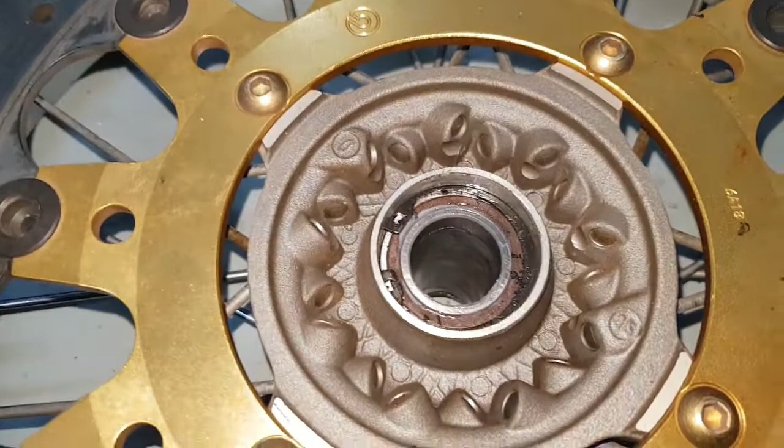Getting to your forks. Don't worry about it. Unfortunately, tomorrow the company closes, and I want to get the front bearings as well. So, yeah, that's the seal. This thing is rock hard. I mean, this thing is not plastic or rubber anymore. It just is. All right, that's the discoloration. So, high time to get rid of this.

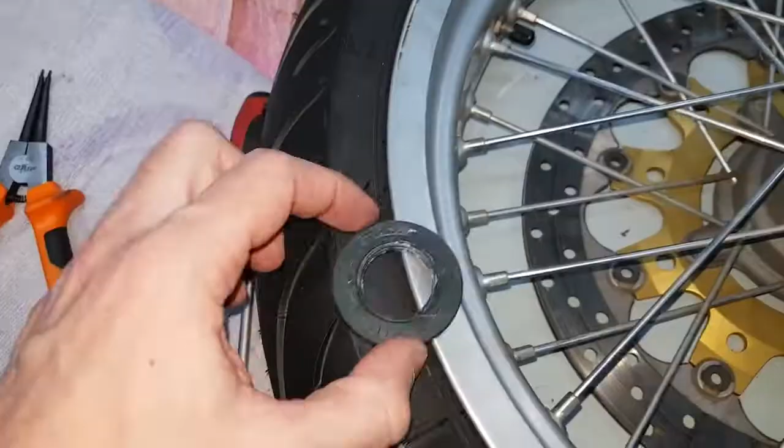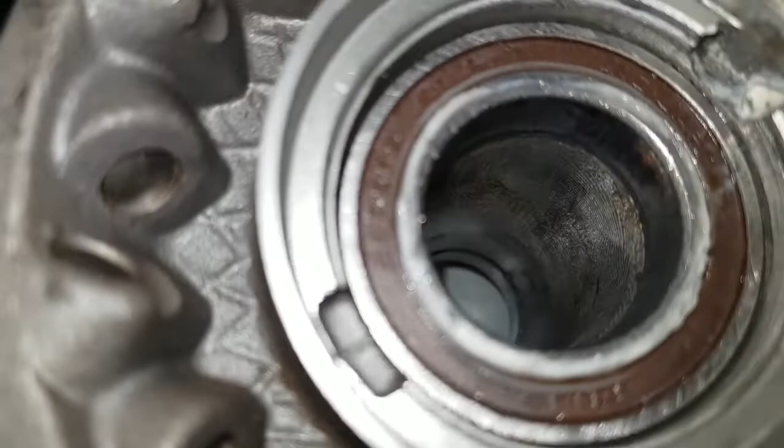That's interesting. Circlips. That is the seal of the other side. That's rust, and this one just popped out. So, just keeping everything. Remember, Patrick, this is where the brake rotor was, this side. Don't get this confused. Let's have a look inside. Okay, looks like one bearing, two bearings. Okay, and spacer. No, should be easy enough.

And there we go. It's the first one with foam inside. And that basically keeps the cylinder inside. But look at that. That damage. There's damage there. Whoever worked on this previously was real ham-fisted.

Treated this poor little wheel like his girlfriend. Remember, real men don't hit women. They control them with your wallet. What? It's true.

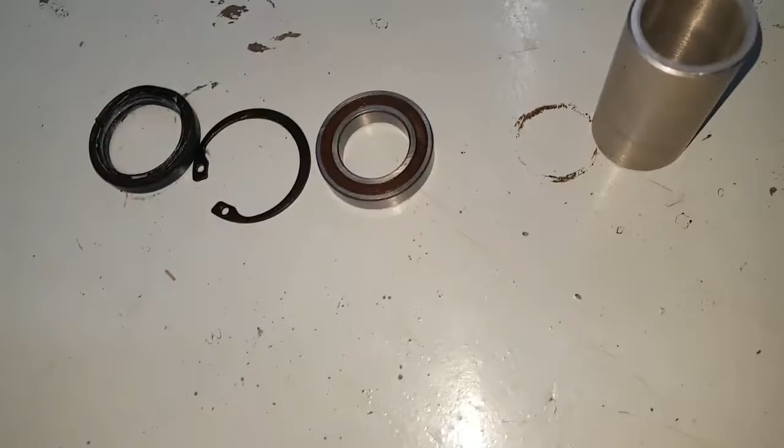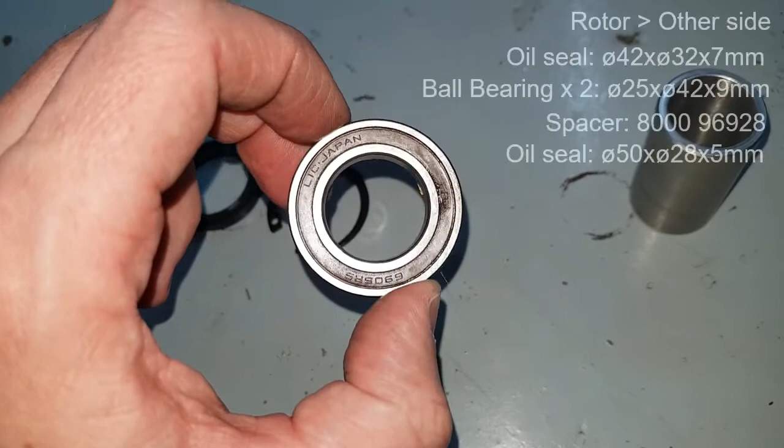Right, and because I'm such a nice guy, you don't have to go to All Balls Racing and all that bullshit. I am going to give you the model numbers of the seals, the bearings, so you can go to the local store and buy them yourself. You don't need to buy these expensive kits. 6905 RS, spacer, obviously Husqvarna. Then this one,

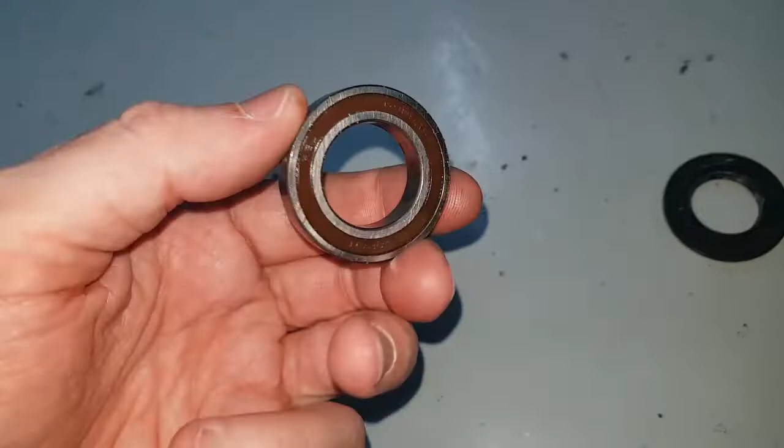6905 RS. Strangely enough, some of these kits for the 610 Supermoto actually have two small bearings, one big one. Not with this one. They're the same size. So don't trust the websites. As I've learned with the SBS brake pads, they're not always accurate. Okay. Enough information. I'll post it in the link if I feel like it. So, tomorrow, new set, and then installation.

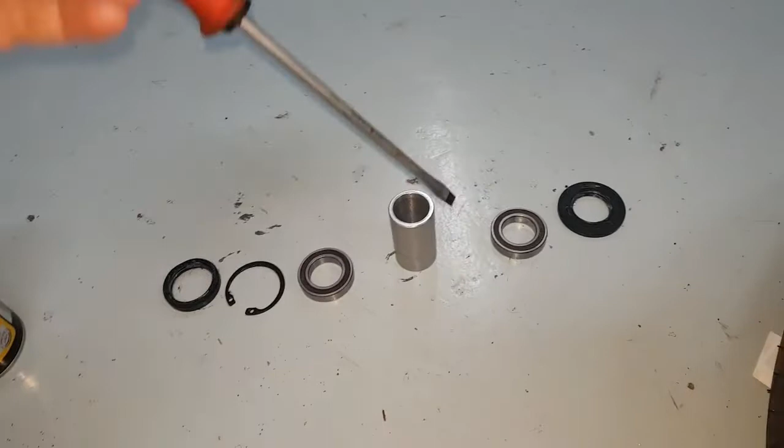How did I take them out? Well, all it takes, and this is easy because there's foam in the middle, you push this, give it a bit of lever action, and this will shift to the one side. Put it on the lip, smack it once. Push this back on the other side, smack it once. And as you go, this thing will move suddenly very easy, and then you just go click, click.

I like to hit, hit, turn, hit, hit, and back. Just keep doing that until it just pops out. That's how I do it. Well, that's how it got done, baby.

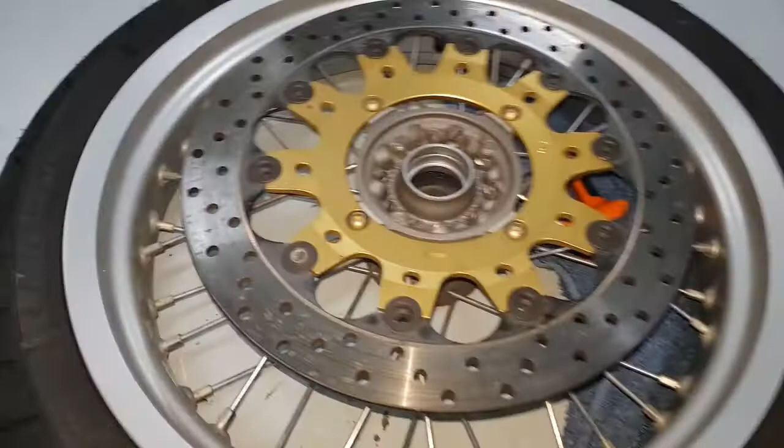He's got the Midas touch, but he touched it too much. If you don't know that song, you're really not old enough for this channel. All right.

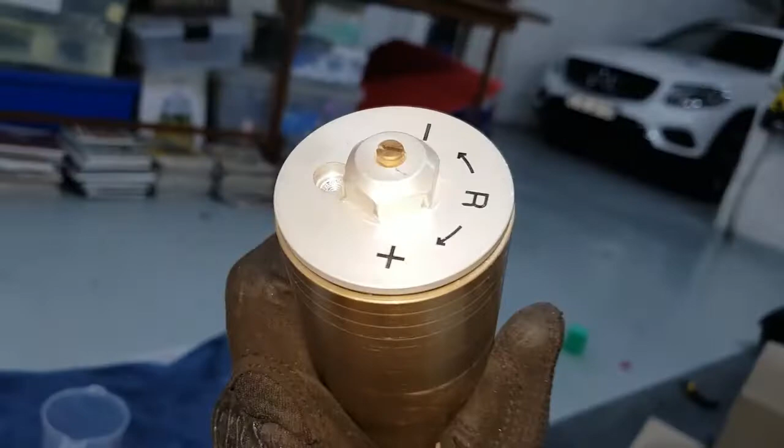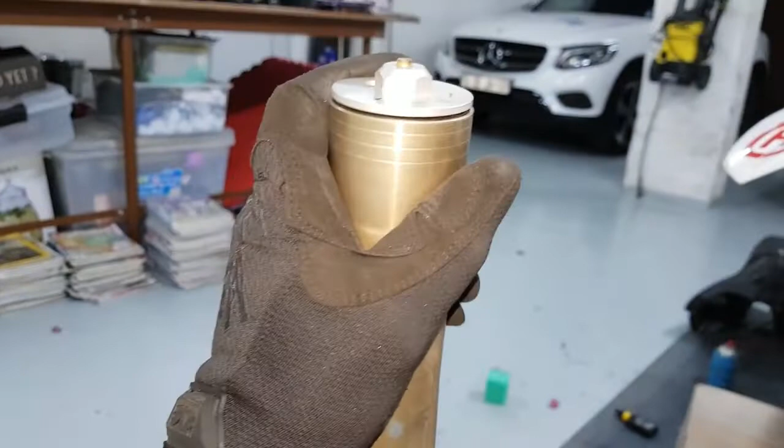That's the fork. Basically, you turn everything to negative, out as much as possible. You remove that screw. That's the bleeding screw. Bleeding screw, period. Prostitute? No. Okay. And while this thing is still on the bike and secure, take the spanner, twist it open at least, and then finagle it out of its holster.

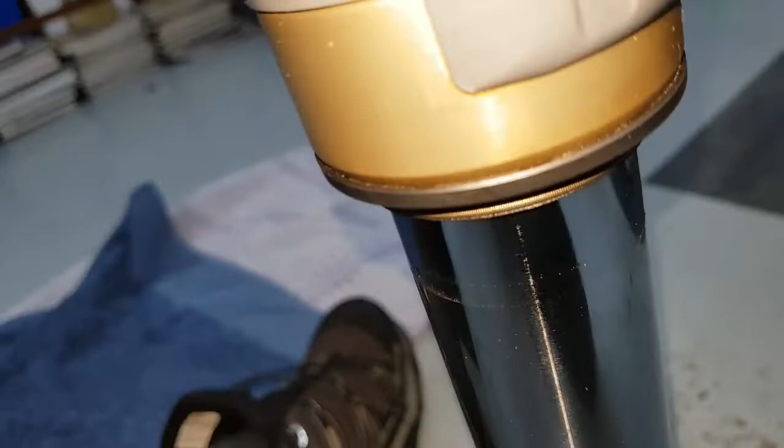Alright, and now we're just going to open it gently, pour out the liquid. Let's see how much there is and what color it is. Obviously it won't be to factory spec because it's already bleeding oil like that. I mean, that's really gone. So, let's see what it is. Yeah, that was in there.

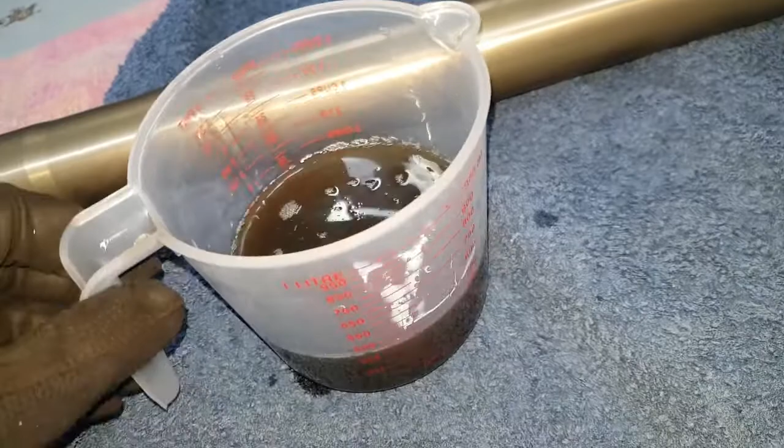Gentlemen, the smell. People call it rotten eggs. It smells like dish soap mixed with rotten eggs. It is pungent. Wow, as soon as you pop the forks, you smell that and it's like, oh, nasty shit. All right, what was in there? 400 milliliters. I don't think that's up to spec. In fact, that thing must have bled a fuckload.

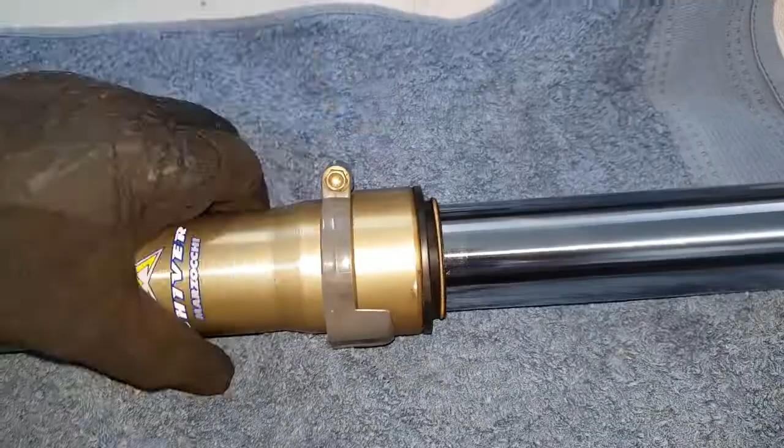Ugh. Yeah. When you open this thing, pour it over. If you leave the front cap on, you can actually just leave it on the floor and pump manually, it'll run straight in. Right, how do you open this? You take a very fine screwdriver, but metal on metal is bad, so take a plastic bag, and with the screwdriver, just create a gap. Don't use the lever action on it. You don't want to scratch any of this. Just go around, creating a space, and then use your fingernails or your wife's fingernails, I don't know, just to get that off. Let's do that.

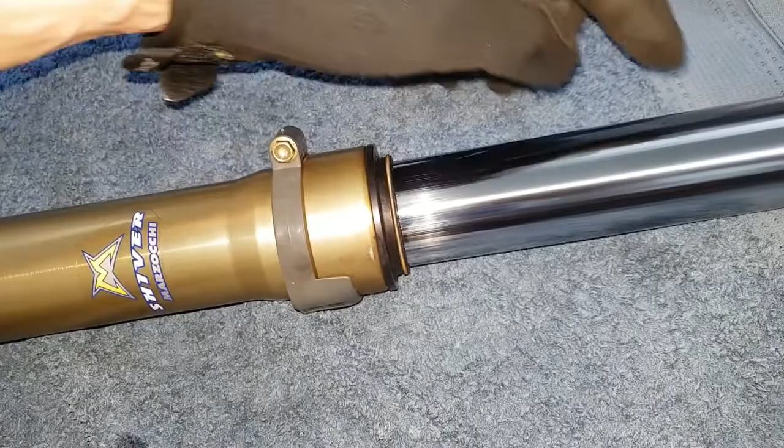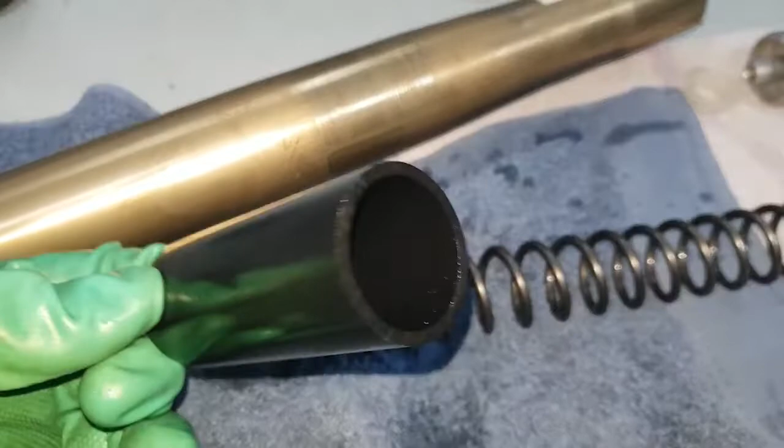Okay, a little bit helter-skelter, but that, then the spring, then this plastic piece, plastic spacer. Usually they went for steel, but yeah, as that goes, and then, yeah, that's dirt. It's old oil. Shit, the amount of gunk in there. Okay, so we're gonna loosen it now. So we've nearly got 450, what is this? Close to half a liter in there. So yeah, we're getting there. Difficulty? Yeah, a little bit.

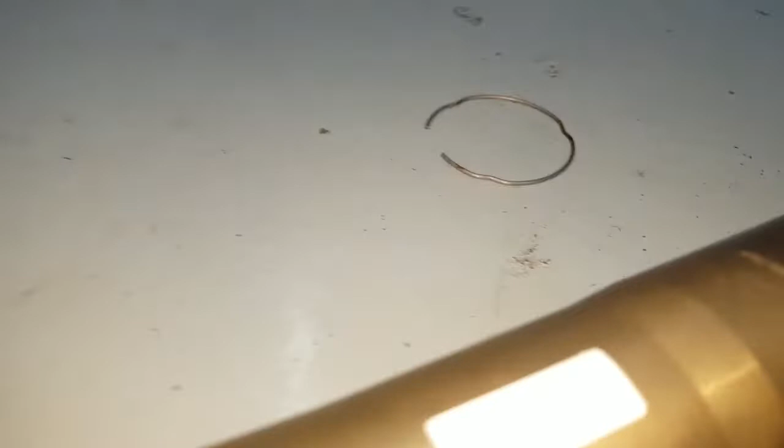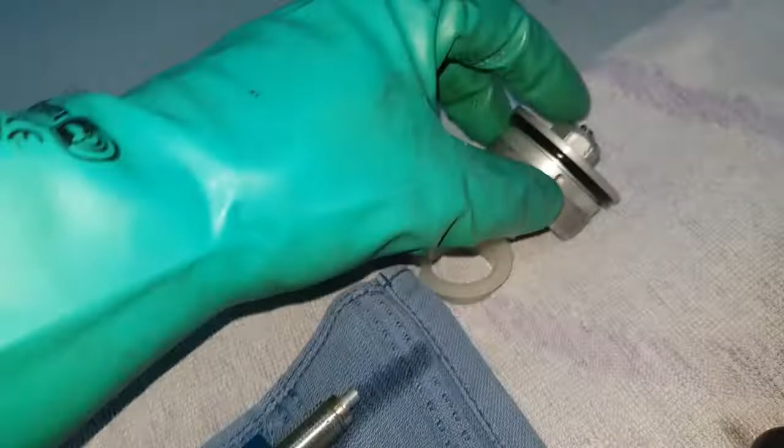Look, when you get the spring out, let me just push this in. You have to push the spring down or get between it. Luckily, there's a lip here for your spanner, so you have to keep it there, and then you keep turning this nut until that goes off. And while you're doing that, force the spring downwards. You do not want that thing jumping against your face. I'm not an expert with forks. This is a first for me. Yes, I know, complicated. And I'm going to leave that in, thank you very much.

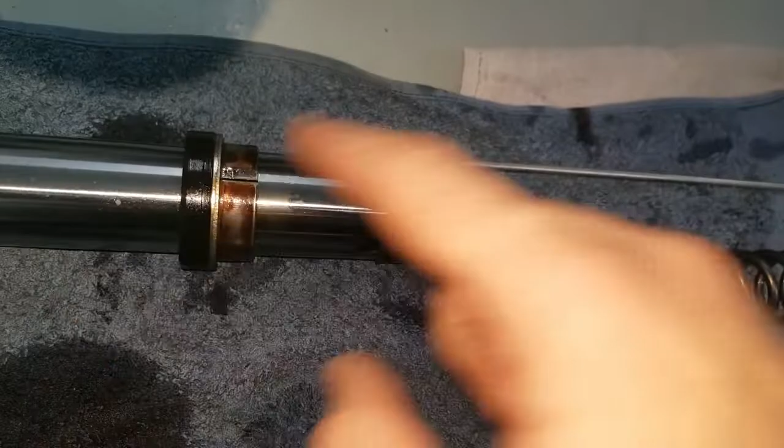If you want to get the rest of the oil out, you do give this a little bit of a chimney sweep, okay? Now, once you've pretty much disassembled everything, you take this side, you take that side, and you keep knocking them like you're taking two siblings apart before knocking their heads together. Then everything comes apart. This, we're going to use a flathead screwdriver, pry it open, away. This one, take it off. See what damage this is. I hope this isn't rust. Or at least no scoring.

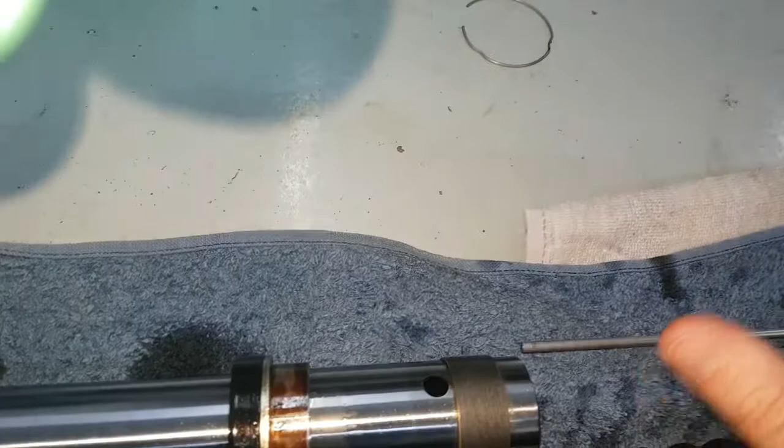Remember, keep everything as organized as possible. Don't use my example, please. Okay. And there we go. So this was the dust cover, the little metal braid I took off, the clamp, the seal. Note which direction goes what. The retaining spring, or whatever you want to call that little band, goes downwards towards the fork. That goes inside. I mean, look at that. Yeesh.

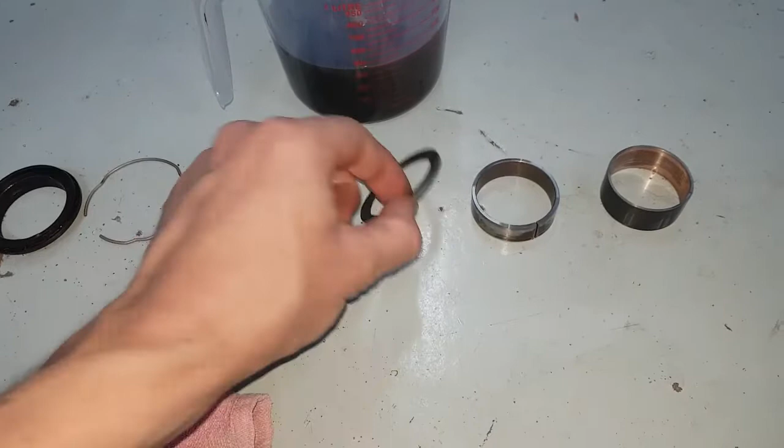Then comes the spacer. Then comes the big one. I don't think this is rust, or at least I don't know. I'm going to use very fine sandpaper just to, let's see. There's no scoring or damages. Same here. Copper's still pretty damn decent. It's a little bit worn, but not bad.

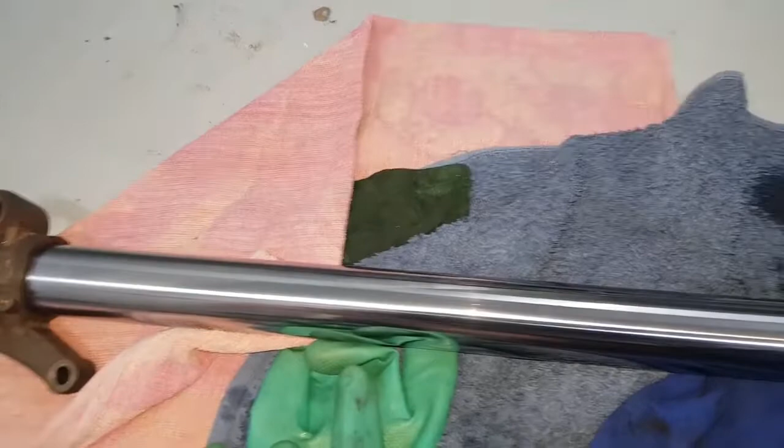So what does this teach us? Clean, and you have to change the fluid in your forks. And gentlemen, this is the first time I'm doing this, and I've succeeded in not costing me that much money, okay? So it's easy enough to do. While it's like this, inspect it for any blemishes. Use a bit of brake cleaner to get the oil off.

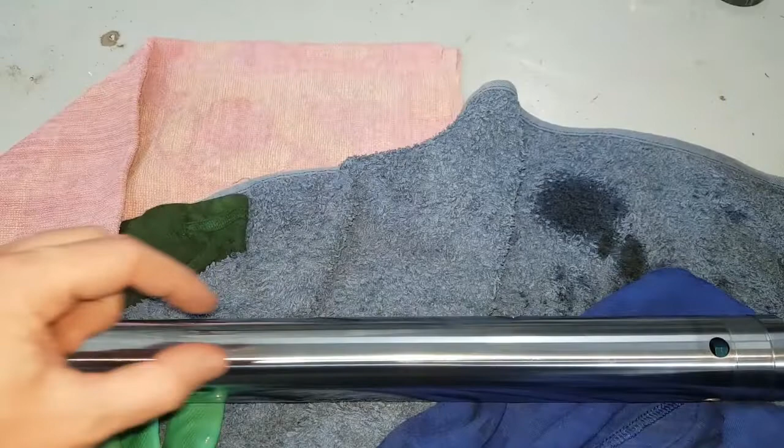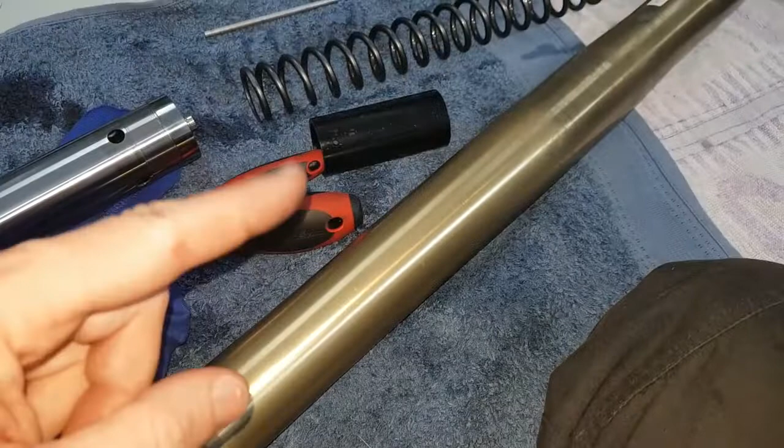You can also brake clean inside, but because of that whole action, it'll suck it in, and brake cleaner fumes are flammable. There's a hell of a lot of pressure. You know how a diesel car makes an explosion in the engine, right? So you don't want that. Rather, this one you can do because it's hollow inside, so I'm just going to spray it down, get most of the gunk out, give everything a wipe down, and then let's reassemble.

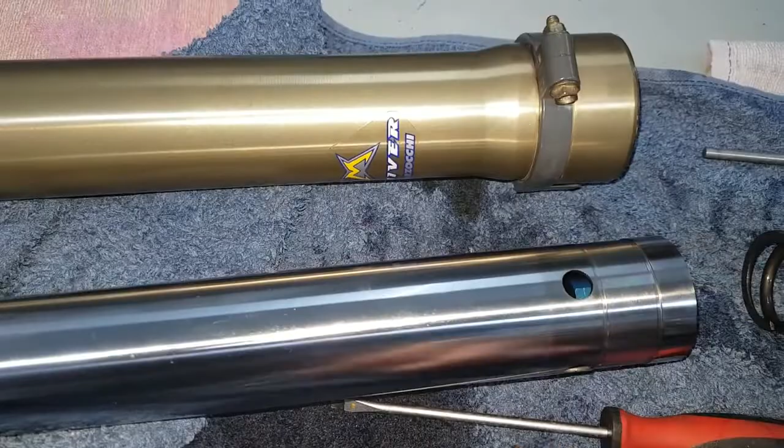Okay, time to reassemble. Now, this one goes first. We have to put red rubber grease around it. It'll help it slide and protect it. There are sharp edges here. So you can either cut up an old polyethylene milk carton, put that across. You can use shrink wrap, or if you're real fucking cheap and lazy, you just use the bag that this came in and push that over. Yeah, I know. And there we have it.

Shit. Ladies and gentlemen, beautiful thing, this seal pusher. I mean, all you need is 1, 2, 3. And she is perfect, you know. And you know, when it's there, the sound changes. Hollow, hollow, solid. Absolutely brilliant stuff. Although, you can use the PVC pipe trick, but you know I'm lazy and not creative enough. So let's put everything back together.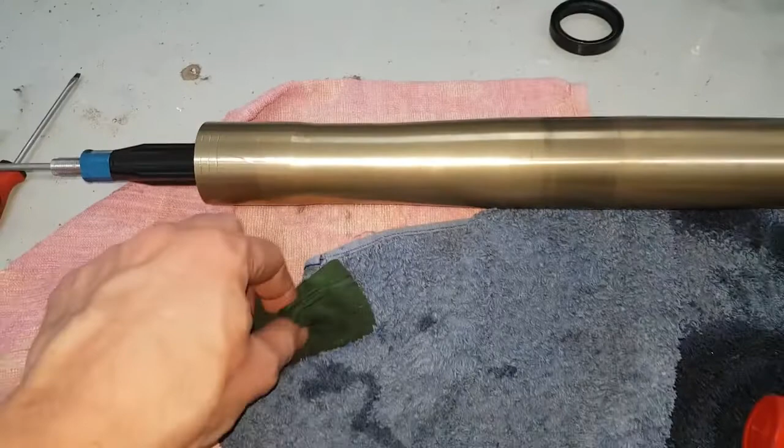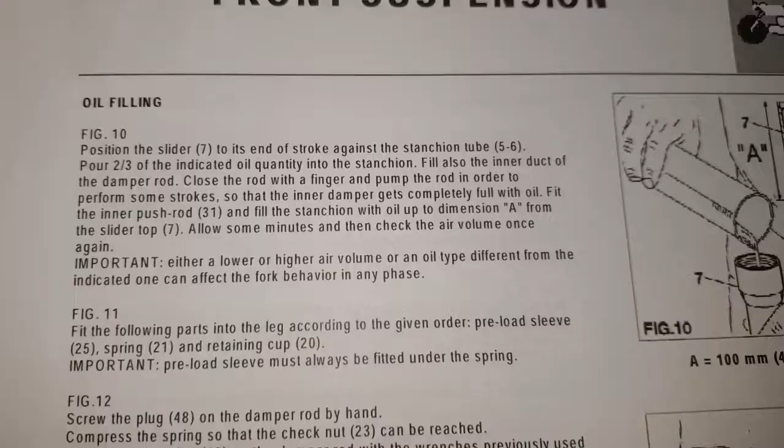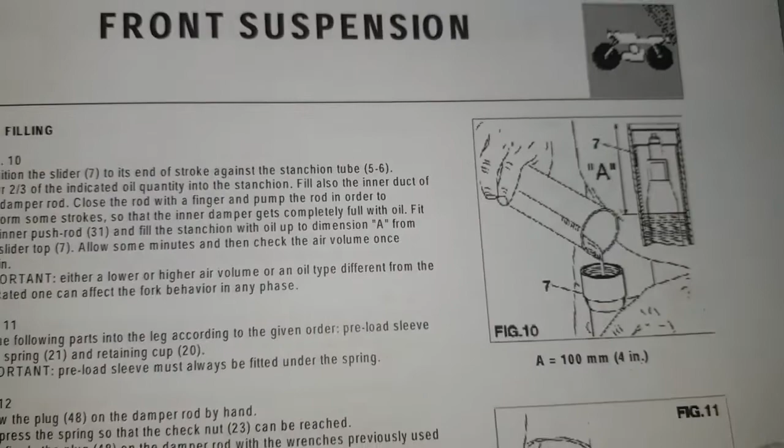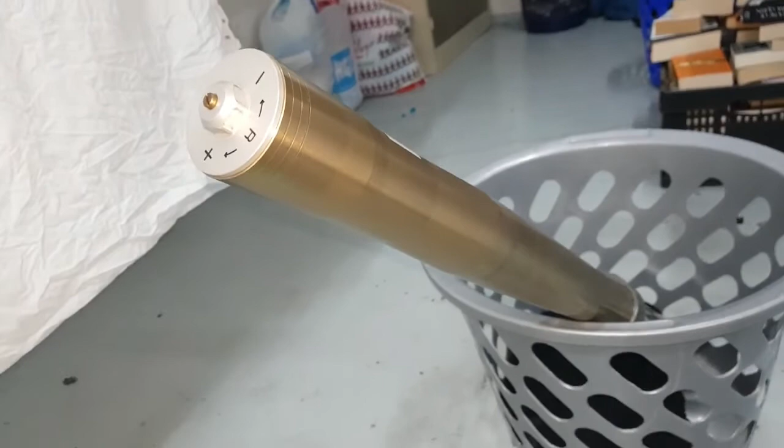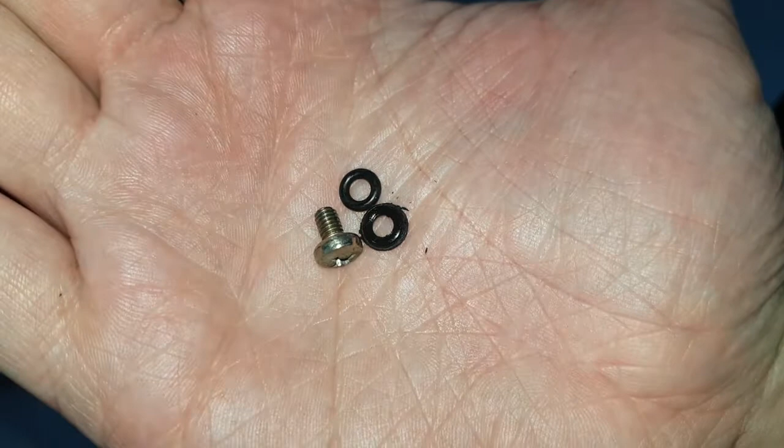Pour that in, do a measurement. Obviously plenty of this action to make sure every cavity is full. And then let's see. And there we go, in the wash basket. Works. Give it a few pumps and then close off the fork bleed hole. While you're doing that, the big squashed O-ring, that was the original. The other one's a new one. Where do I get these? Go to your local paintball range. Paintball markers use these sort of O-rings quite frequently.

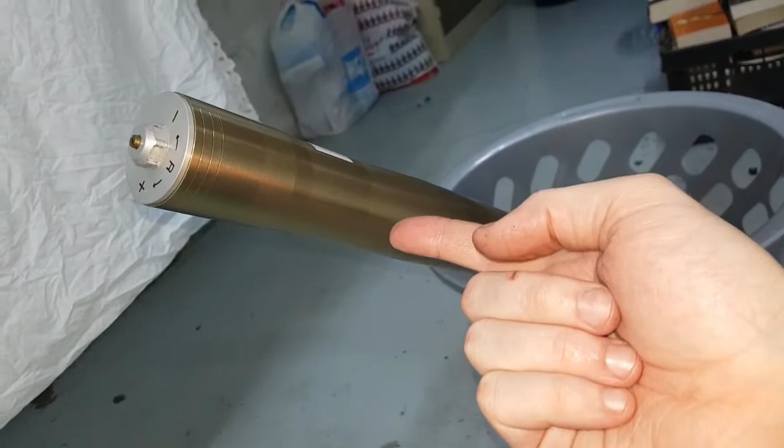Anything else you should consider while doing this? Obviously, the 10 centimeters, you can't put a tape measure in there, so just tape up a screwdriver at the level, put it in there, and there you go. Fluid, I used 650 milliliters, plus minus 1 or 2 milliliters. And as soon as I put that in, there was already a different response. With the old crap, it was like, okay, now you get force, no nothing. This stuff, you can really feel a difference.

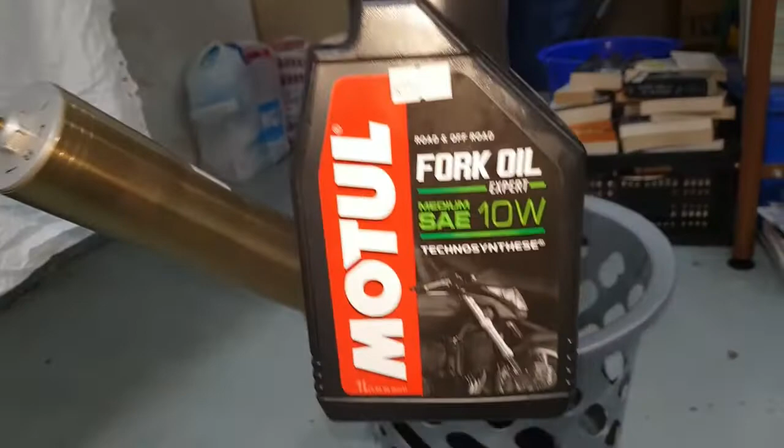And what am I using? Motul 10W. The spec is 7.5, but I'm a little heavier than those little Italians, so let's go 10W, huh? They even say harsh condition, you must use 5W. Yeah, no, 10W will work. I mean, I don't even know how to set these things up now. I've dialed everything out, now I have to dial everything in. I have no idea how to do that. Learning curve ahead. Not much better with the other fork.

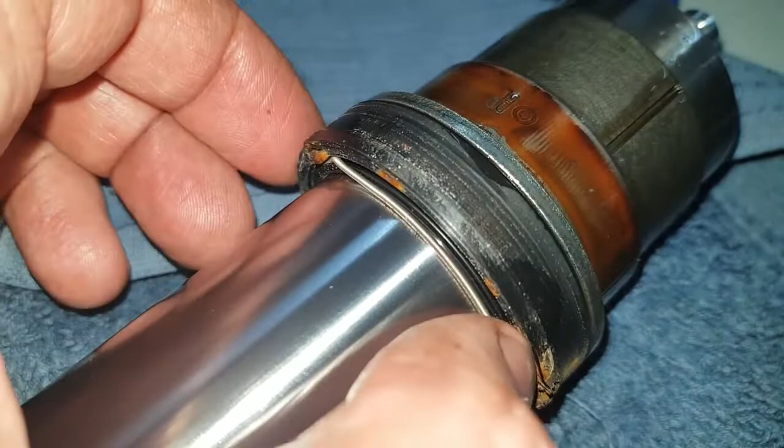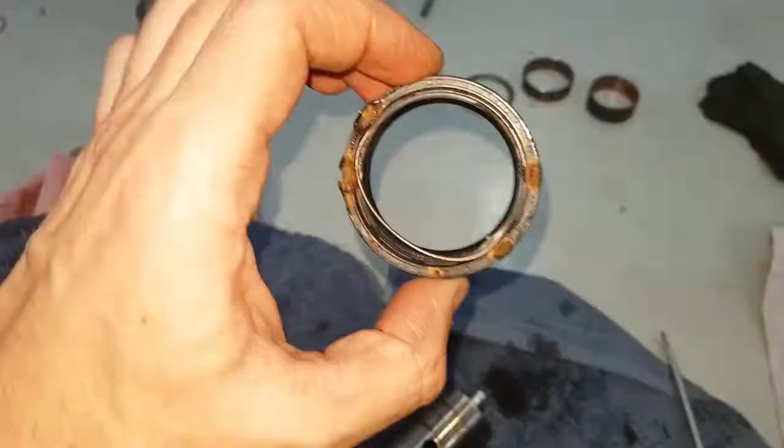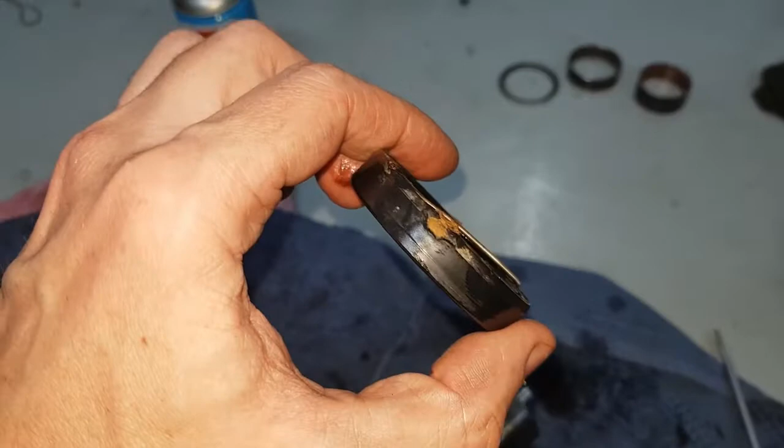I mean, holy hell. The seal was ready to go as well. I mean, the retaining spring isn't even... Look at that. Okay, ladies and gentlemen, I hope I've taught you something. Service your damn fork. Yeah, this is why you get a fork seal driver. I mean, you can basically see what happened here. How this seal was forced in with a fucking screwdriver. Oh, this makes me mad. Why can't people do... Forget it, Patrick. Only raises your blood pressure.

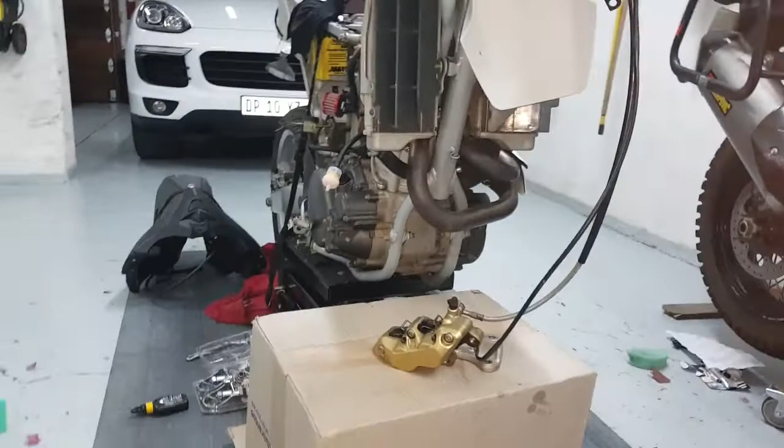Yeah, don't look at me like that. I know. We'll get you on the road soon.

Confession time. Right. How long did it take? The first one, half an hour. The second one, once I knew what the internals were like and what I was supposed to do, 15-20 minutes tops. No problem at all. Whew. But it feels good to have done that. It's like servicing the cooling fluid, like doing an oil change. It just feels right. You get this sense of accomplishment. And when I saw those seals and that oil in there, ooh, completely corroded. Okay, so forks are done.

Tomorrow, my dear, we're gonna have a look at your steering bearing, the head bearing.